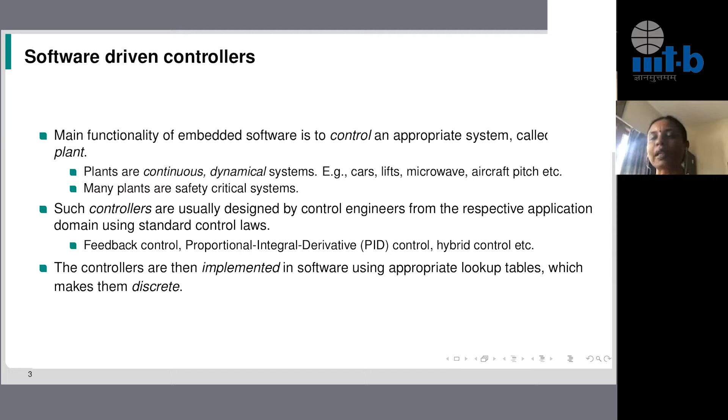So we implement it in software, so the controller becomes a discrete entity because it's a piece of software. Whereas the plant has a lot of physics, so it stays as a continuous entity. So this brings in a lot of complexity in terms of the kind of maths that you have to handle in terms of modeling these controllers.

So I'll also spend a few minutes talking about what are the typical properties that are being verified when it comes to such controllers. There are several different properties, but the broad class of properties that formal methods people are interested in can be categorized as given in the slides. The first class of properties is what we call rise time properties. Let's take the example of this cruise control system in a car.

So the driver decided to take a break, or even a pilot in a plane decides to take a break, and he switches on this drive-by-wire system or the autopilot system. So the system needs anywhere from a few milliseconds to a few seconds to achieve the desired speed with the desired distance and the desired control algorithms. So that time that we give the system is what we call a rise time. Rise time is an initial fragment of time given for the system to reach the desired state.

But it could be far away from the desired state to start with. So we account for a large class of errors till the rise time is over. And after the rise time, the controller settles down, and that fragment we call the settling time, in the sense that the controller is fully active, running, and it is controlling the plant. It is driving the car, it's driving the plane. So at this point, our threshold for tolerance in errors becomes very small. I have put a generous fragment of 2%. It's usually less than that.

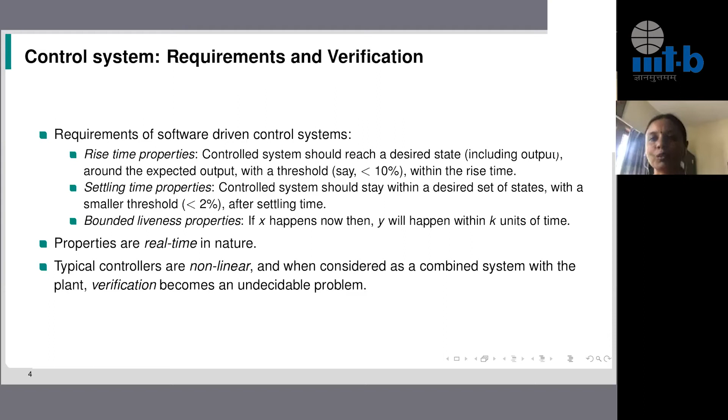Thanks. Okay. So coming back to my point about testing and simulation. Test engineers very effectively verify rise time properties, bounded liveness properties. But settling time property is literally like the controller lives happily ever after kind of thing. As long as the controller is running, it should be within a desired band, within a threshold of the desired state forever. So there is no boundedness to it. So testing and simulation cannot be used. So we would ideally like an automated mathematical proof to be able to verify these requirements.

So here is an introduction to the problem that we are precisely looking at. We are looking at linear systems that are dynamical in nature, that are controlled by PID controllers. I'll explain what a PID controller is at a high level in the next slide. We would like to use program verification techniques, techniques that have been used to verify software like C programs or Java programs, to verify control systems. As Sachit said, control engineers know how to give a pen and paper proof, but our goal is to use program verification, which is push button automatic, to verify control systems.

So in our attempt to do that, we've built a small tool for verifying Simulink models for control systems that our industry partners have been using. So here are the examples of control systems that we've tried it out on. It has worked on some, failed on some. I'll give you a table at the end of where it's worked.

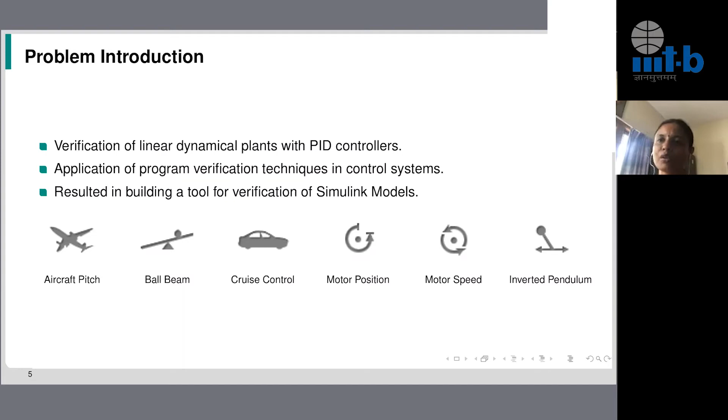Aircraft pitch control system; ball and beam, which is basically a balancing ball; cruise control, which is like an X-by-wire in a car; motor position, which controls valves and motors in any kind of valve pump system; motor speed, which controls the speed of motors; inverted pendulum, a classical physics example to illustrate a dynamical system. These are benchmark Simulink examples, standardly used in university education. I'll give you a table about how successful we've been in our experiments.

So here is how a PID controller looks. On your right, you will find a box called plant. T is for time, U is the input to the plant, X represents the state of the plant. All these are vectors, matrices, you can think of them as. X dot is the rate at which the state of the plant varies with time. X naught is the initial state. So there is some kind of a linear differential equation that controls the dynamics of a plant.

So we would like to hook up a controller to this plant and make sure that the plant behaves as desired. If it's a car, it should be driven by the software controller as well as a human would drive it. If it's an autopilot, the plane should be steered as well as a human pilot would. So how do you do that? We attach a controller to the plant.

On the left, there is a controller. So the particular class of controllers that we look at are called PID controllers. P for proportional, I for integral, D for derivative. So what this controller does is it observes the current output from the plant. So the plant gives certain kinds of control outputs which control the actuators in the system. And it takes those outputs, so that's given by the vector Y, which is in turn dependent on the state of the plant. And then it has a history of previous outputs.

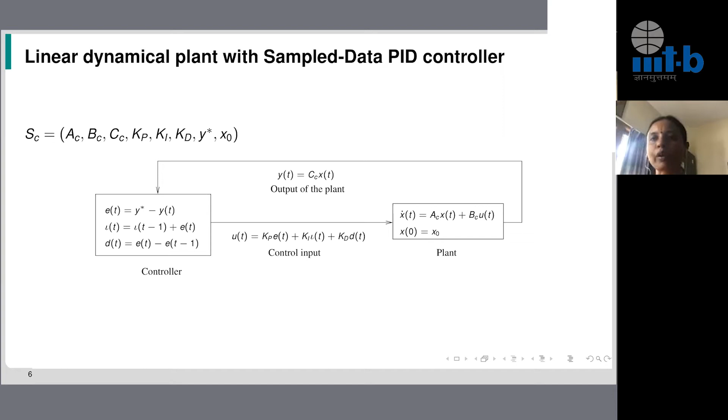So when it comes to requirements, when we do a formal methods talk, we always talk about a system and requirements. So in this slide, I told you about what our system is. It's a PID controller hooked to a plant, which works by sampling data. I'll come to that point. Now, what are our requirements? We concentrate on rise time and settling time requirements.

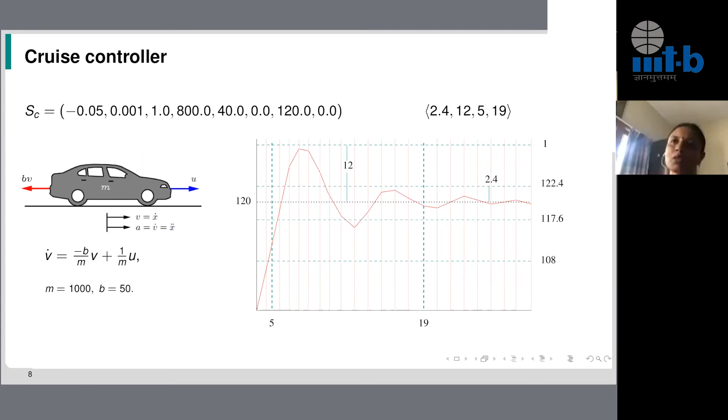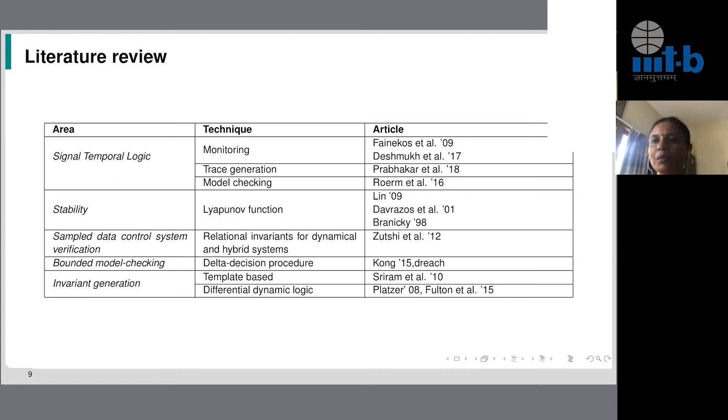So there's a rich body of work. Sorry, from 2001 till about 2018, 2019, there has been active work in this kind of area. So the way we do it is, let me just go back a few slides. We take the same controller, plant, control input and output.

So what we do is, the original plant has a lot of dynamics, right? X dot is A X of t plus B U of t and all that. We let go of all that. We basically abstract it out. You can solve these matrices by considering them as some kind of exponentials. So that is e power A_c into h. h is the time at which the controller samples the plant outputs, every 2 milliseconds, 3 milliseconds, 4 milliseconds. So that is the sampling time h.

Once you sample at these time intervals, you can approximate the dynamics of the plant by using an exponential computation of the differentiation. This is standard numerical analysis. So that's the first equation. What we further do is try to get rid of the e power A_c h also, by considering them as approximations of certain matrices. So that's the second part. Now we've gotten rid of the original plant, which was a dynamical system, and replaced it with a whole set of matrices which compute certain approximations.

One technical point here is that the approximations have to be sound, in the sense that if I claim a particular property is true with reference to the approximate system, it should be true in the original system. This is what we mean by sound over-approximation. So we computed sound over-approximations and came up with an abstract plant. It basically gets rid of those x dot differential equations and replaces them with a whole set of matrices. So that's the first abstraction that we did.

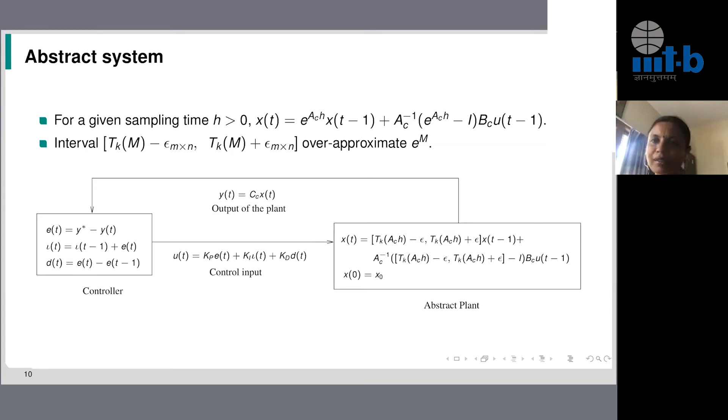The next abstraction we did is, instead of trying to follow a fine curve of the controller, trying to get exact values and give proofs about whether things are true or not, we said we'll abstract that out also. We'll try to work over a band of values. For some reason I'm not able to go back.

If you remember, my original desired values were in the red line, which is inside the green line now. I say I won't exactly bother about the red line. Instead, I'll look at a small interval around the red line, and that's this green colored band. So I won't compute the exact output, but I might compute somewhere around the output. This is what we are interested in tracking.

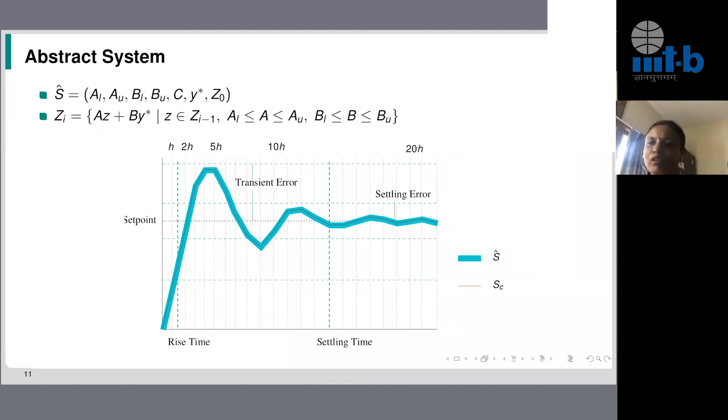And now what we do is we say, okay, I'll compute this output to a certain extent. And this also turns out to be expensive to formally verify. So we partly give up on this. We say that after the settling time, we are happy with a box around this entire curve. So first I had a curve, then I had a small band that was a reasonably close approximation of the curve. After some point, I give up on the band also. I say I'm happy with a box around the curve.

What I have shown in this picture is in 2D, but in general, these are matrices. So the box is a box around the matrix of behaviors. So what we compute actually is what we call a box invariant, which helps us to prove that settling time properties indeed hold within a certain band.

So we come up with a two-stage verification approach. So please remember, from the time the controller starts, I have rise time where the controller is allowed to behave erratically and settle down while reaching the set point. And after the controller settles down, the settling time defines that the controller is not allowed to move too much off its mark.

So what we try to do is, from the beginning of controller computation till settling time, we use a symbolic execution based verification approach. And post settling time, as long as the controller is active, we use this notion of box invariant to compute an over approximation by which we say verification holds.

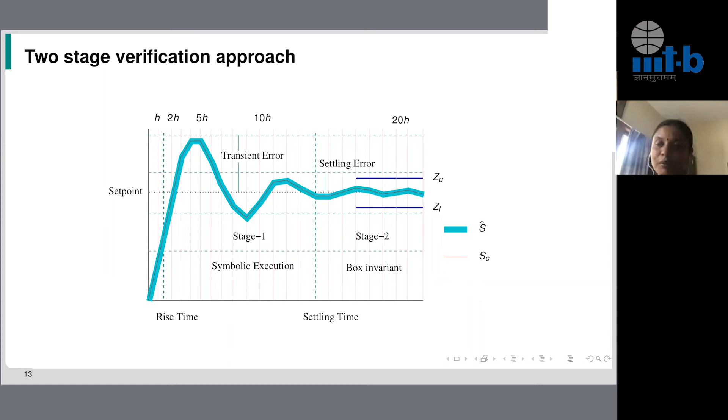So here are some results that we have. I'll try to explain the statement of this theorem. So what we first did was we got rid of the plant dynamics. We came up with matrices that over approximated the plant dynamics. So that's our abstract system S cap. And so we don't have the exact state X. Instead, we have these ZL, ZU, which are lower and upper bound on the exact state. So we say that the exact state stays somewhere between these states, ZL and ZU.

And then what we basically phrased was these two conditions, C1 and C2, which guarantee that our approximations, the box that we compute, gives us a sound over approximation. So if conditions C1 and C2 hold, then the ZL, ZU, which is the lower and upper bound on the actual state vector, stays invariant for the control system after the settling time. So this was the theorem that we proved. This forms the crux of our algorithm.

So how do you compute such a box invariant? How do you compute the ZL and ZU? So there is no point in holding on to this theorem and saying that I can do it. We usually look for effective methods, which means we look for algorithms that compute these box invariants. So two approaches were proposed. One was a purely symbolic approach, which relies on a constraint solver. The other one was a combination of numeric and symbolic approach, where we evaluate the matrices ourselves. In the first one, we rely on the solver to evaluate the matrix automatically.

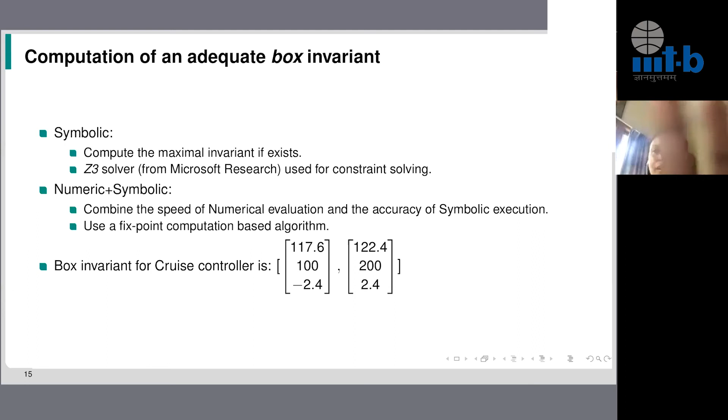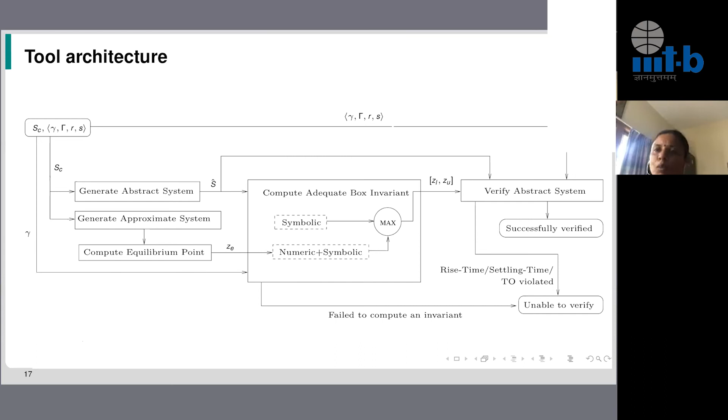Or even earlier, it could time out in the sense that I can't compute my invariant symbolically. I can't compute my invariant numerically. I just fail miserably. So for difficult systems, even these things can happen. But what we've been able to achieve is that using a combination of these approaches and our cleverly generated approximation, we've been able to push the set of benchmarks which have been automatically verified a little more than what is present in the state of the art.